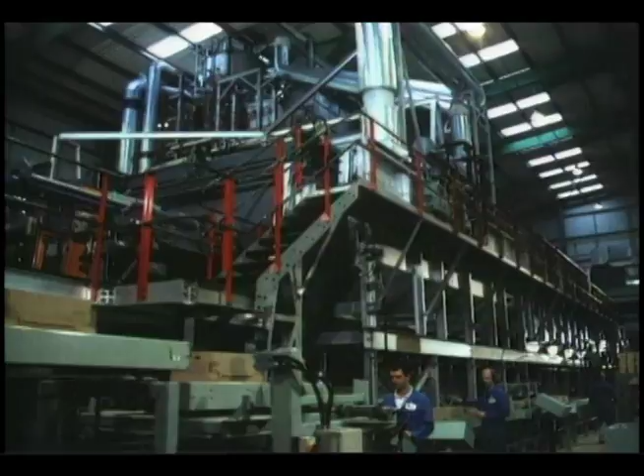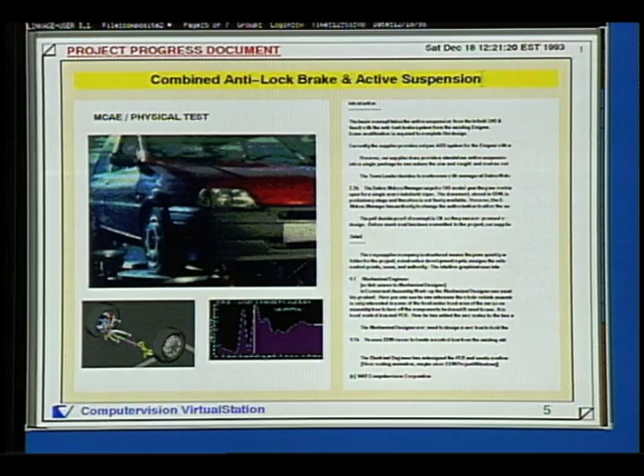Competition. It's the driving force keeping companies on top of their game. To stay on top, a company must constantly be on the move to improve their business, not how it is today, but how it will be tomorrow. What will keep them one step ahead of their competition? Re-engineering the product development process for flexibility and rapid response to changing business requirements is the key. And that key is realized through efficient data management, optimally using product information as a competitive advantage.

Sabre Motors has been doing this for a number of years, and it's kept them on top, especially with their mid-size sports sedan, the Elite. The Elite's enjoyed being #1 in its class for several years, but the competition's been extremely tough. Today, it faces a major challenge from the Toyota Camry for the #1 spot in 1995.

Well, the Camry has made a major upgrade in its MacPherson strut suspension system for 1995. They're attempting to appeal to the consumer's demand for a more aggressive, well-balanced ride from a mid-size sports sedan.

So to maintain our leadership in this class, we've decided to make a bold move. We want to offer a combined package of ABS braking and active suspension, all controlled by one ICU, an intelligent control unit. It's really a major undertaking on our part, but one we feel is necessary to maintain our leadership position. To undertake a course of action such as this, a company must be confident in both its resources and its infrastructure. Sabre Motors has a history of constantly and consistently rising to the challenge by always looking ahead, seeing how best to align itself to the job at hand.

And one of the keys that Sabre's come to rely on is its agile product development process. The automotive arena has always been one of constant change. Ever since Henry Ford began running Model Ts down an assembly line, the call has been for innovation and thinking about tomorrow. The concept of re-engineering is a way to maintain those principles.

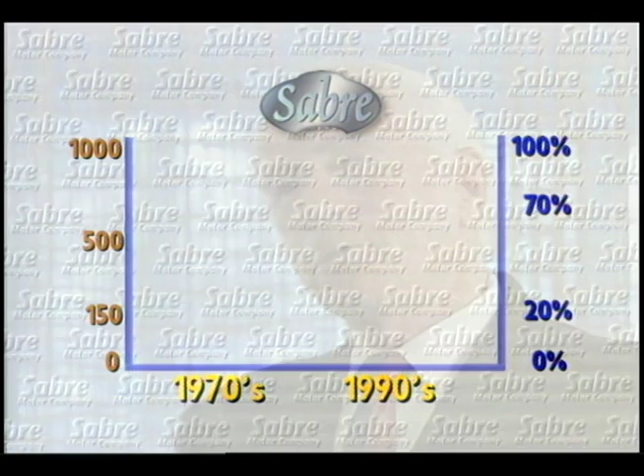And a key part of constantly reconstructing our processes is having a virtual team of key suppliers as our extended enterprise. Now, back in the 1970s, we had a cadre of about 1,000 suppliers who worked on parts and components that made up about 20% of our automobiles. Today, we have fewer than 150 suppliers, not only designing and building parts and components, but also major subassemblies and assemblies that make up 70% of our automobiles.

They are true partners in our business, and the relationships we form with them are critical to our success. In fact, today, we only need to concentrate on the activities at which we excel: body styling, powertrain, and final assembly. For this project, we'll call on Intuitive Vehicle Systems, or IVS as we know them, to design and manufacture the suspension and brake assembly.

Now, their technology matches ours, so we can offload a project such as this to them and still have an in-house sense of communication. What I mean by this is I have this workflow management tool, which essentially provides me with the ability to define, monitor, and redefine any product development process that I have.

Now, with this tool, I can define a new process with 4 major stages: concept, in-work, road test, and release. Since the project has been assigned to IVS, I can monitor them through this tool, and they can interact with me to keep me updated. I can assign milestones and control points along the process.

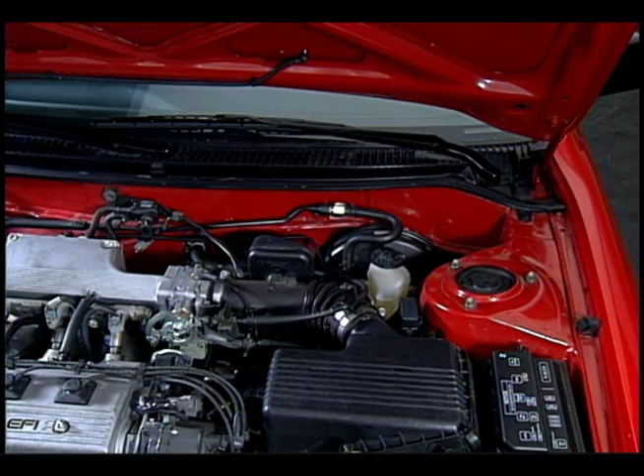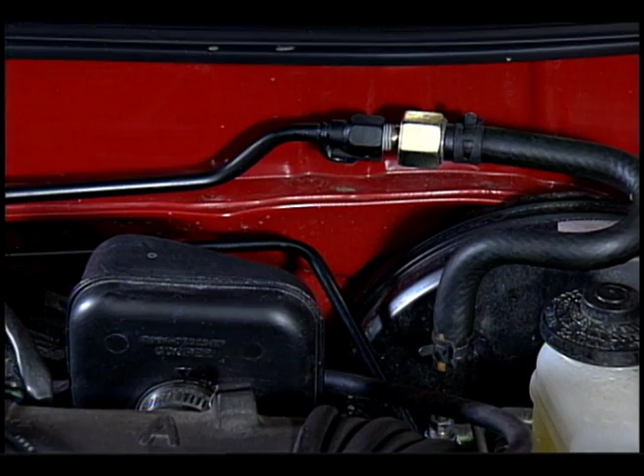We've got to take the existing ABS braking system from the Elite, modify an existing active suspension we created for another manufacturer's upscale model, create an ICU to control both systems, and then fit the control unit and related harnessing into the engine compartment. Now, my first concern is with the real estate under the hood. There always seems to be a problem finding a suitable location for these types of components because the engine compartment in today's car is so tightly packed.

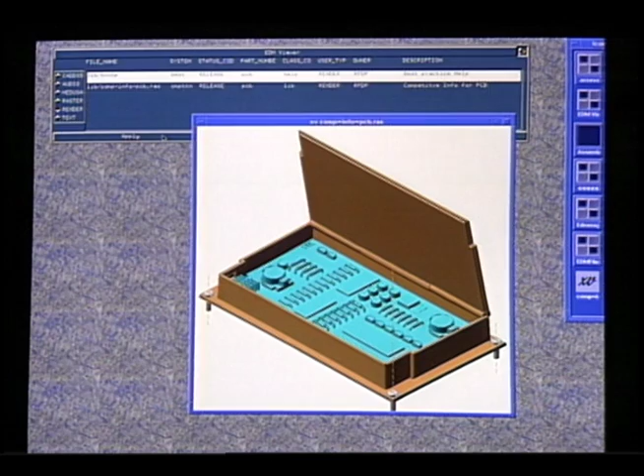Before I begin my design, I want to check my database for our best practices in creating these systems. In his data management system, Doug finds multimedia documents created during past projects outlining the proper steps involved in designing these types of systems, providing an invaluable roadmap for his current task. Doug notes he has mail from Evan Stokowski, the control system designer.

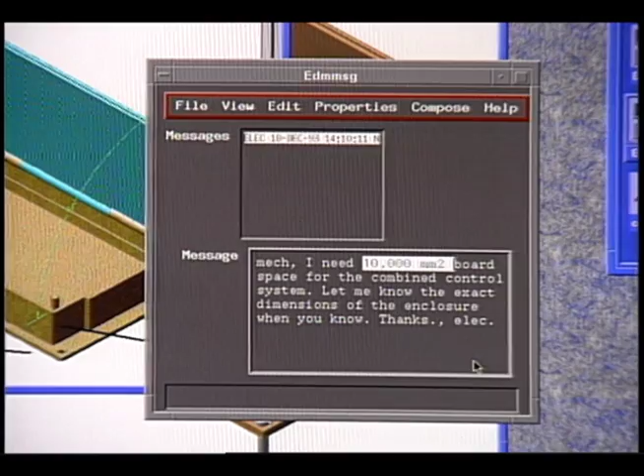Evan has analyzed the requirements for the ICU and identified the necessary PC board space he'll need. Now, I've checked my historical documentation on these types of assemblies, and I've gotten my PC board requirements from the control system designer. By looking at my past documentation, I confirmed that the best location for the ICU will be high on the bulkhead, away from the water and heat.

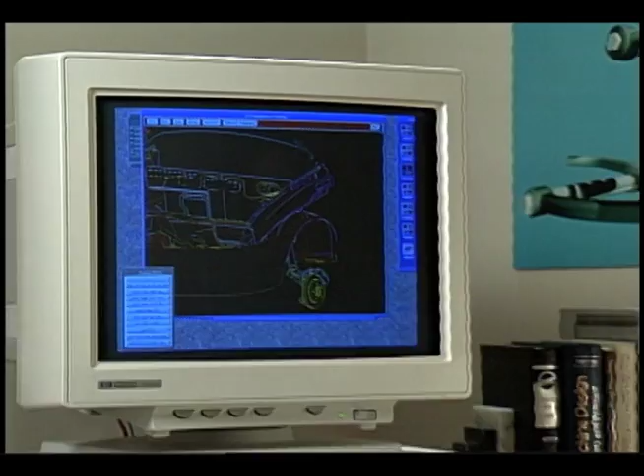Now, what I suspected is true. With the board space required, there's an interference with one of the windshield wiper motors. I need to discuss this with Ray Atkinson over at Sabre before I proceed.

Doug discovered this interference by looking at actual Sabre drawings on his system. He now contacts Ray to begin a CV conference. This conferencing capability will allow both Doug and Ray to view the actual part file, which can be worked on by either party, and discuss the pertinent issues involved.

When I got the size requirements for the ICU, I was afraid this would be the case. As you can see here, the ICU placement clashes with the left side wiper motor.

Now, hold on a second, Doug. I don't think we have a problem here. Let me just check some documentation on this.

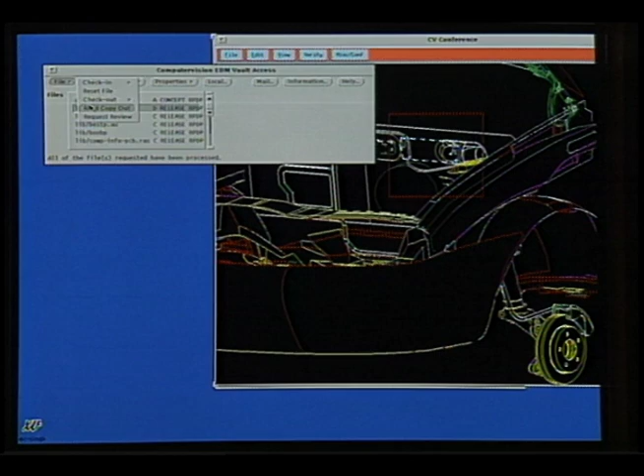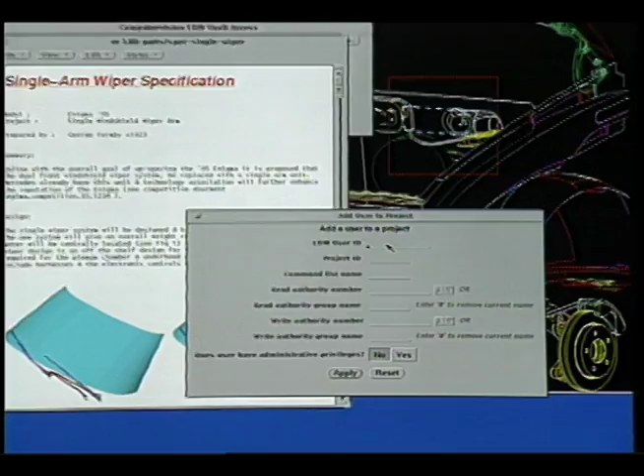Yes, just as I thought. I've got some good news for you. We're incorporating a single windshield wiper design for the 95 Entima, and we've got another supplier creating the design specs. Let me just change the authorization so you have read access to the wiper project document, and that should help you with the ICU placement.

Ray has the ability to authorize Doug to review the new windshield wiper design from another supplier because they all share the same technology.

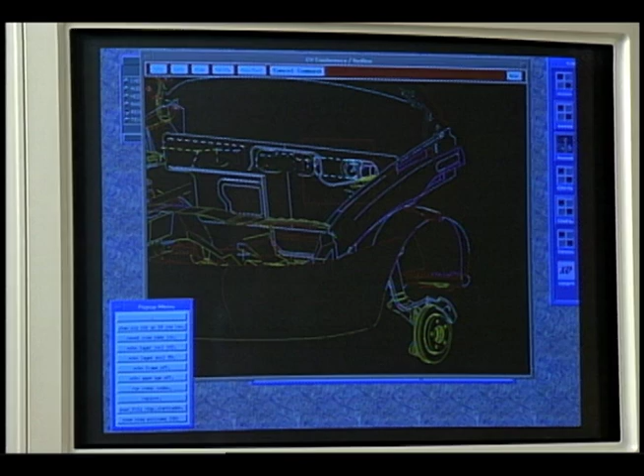Once Ray has provided Doug with this access, Doug can call up the new design, overlay it with his existing design, and see that the interference is no longer a problem. Now both suppliers have been added to each other's development project so that they will receive updated informational messages.

Okay, Ray, I see what I'm working with now. This shouldn't be a problem. I'll be in touch. All right, bye-bye.

A simple conference on the phone and the screen alleviates a lot of problems for me. I'm able to eliminate the interference I was worried about, and I'm able to see what the other supplier is doing with their new wiper design. Without these capabilities at my fingertips, I could have spent days running down the wrong road.

Doug has completed the first stage of the process, the concept stage. He can now move on in the project to the in-work stage. Once he's done this, notification is automatically sent to every member of the team.

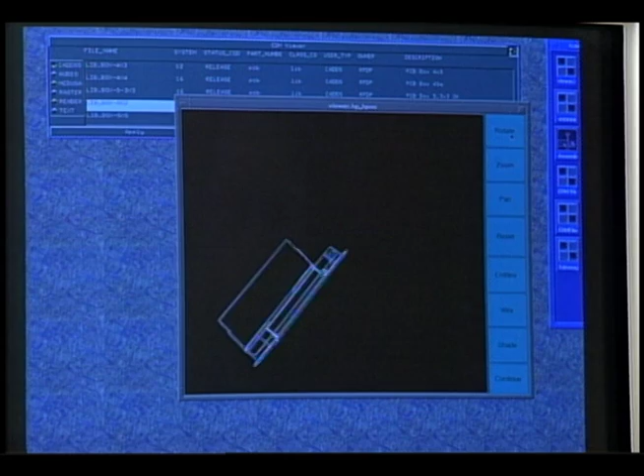Using the real estate requirements from the control system designer, Doug, with a simple query of his library, can browse through a number of existing designs. Doug finds several boxes which will serve his needs. He can call up the parts on his system and view them. From this, he can decide if one of them will suit the cabling and fitting requirements within the engine compartment.

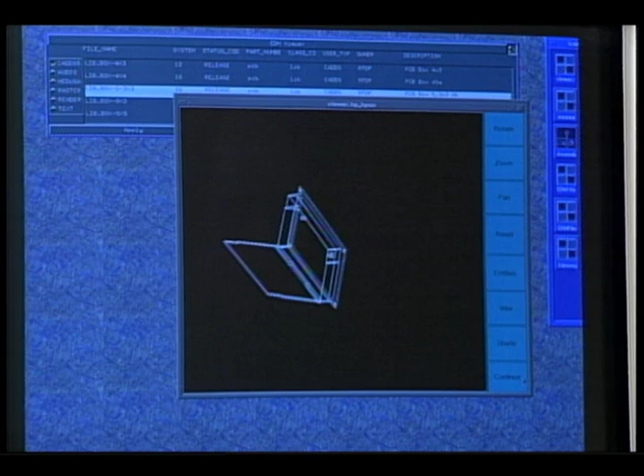Doug finds the box he needs existing within the database and sends the physical specifications off by mail to Evan Stokowski, the control system designer.

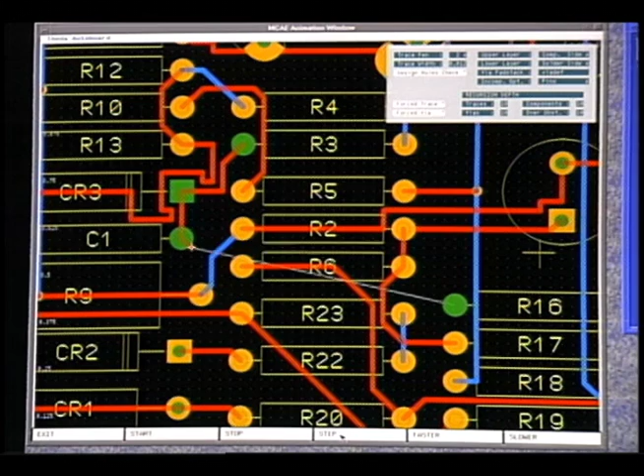When I received the mail from Doug containing the selected enclosure box, I was able to take my preliminary PC board design and tailor it to fit the box's exact measurement and features. It was fairly simple just to reposition the components and reroute the connections so I would have a functional board controlling both the ABS brakes and active suspension system. Then I just transferred the logic board design through to a three-dimensional representation to use within the mechanical assembly.

It's now time for Doug to finalize his design. To do so, he'll begin with a definition of the assembly and subassembly relationships of the entire vehicle. But Doug is only interested in the engine compartment, so he can go to his assembly tree and concentrate only on the components he needs to see.

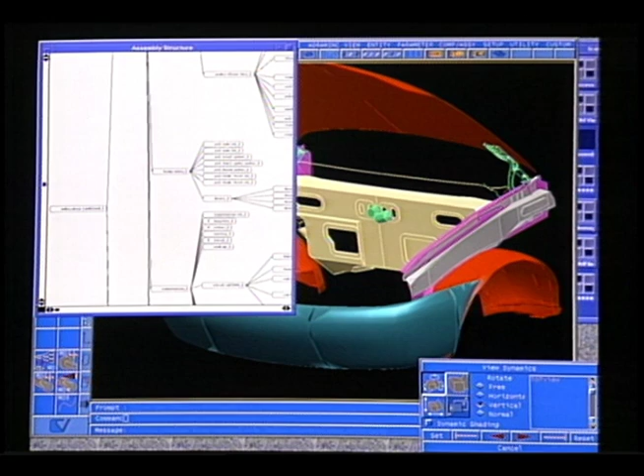I want to create a new subassembly for the design work that I want to incorporate: the ABS system, the modified active suspension system, and the enclosure box. Now, as I do this, my mechanical assembly is automatically updated.

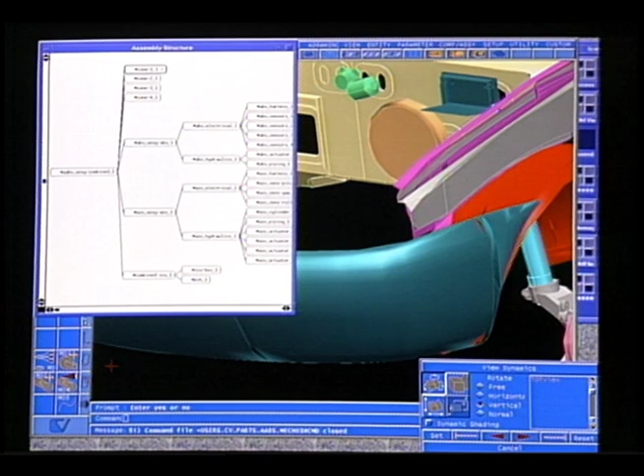Now that he has brought in these new assemblies, he can bring them out of his data management system and locate them where he wants them. The enclosure box is placed on the bulkhead, where Doug can run interference checks to reconfirm there are no clashes with the surrounding components. It's fine where he's placed it.

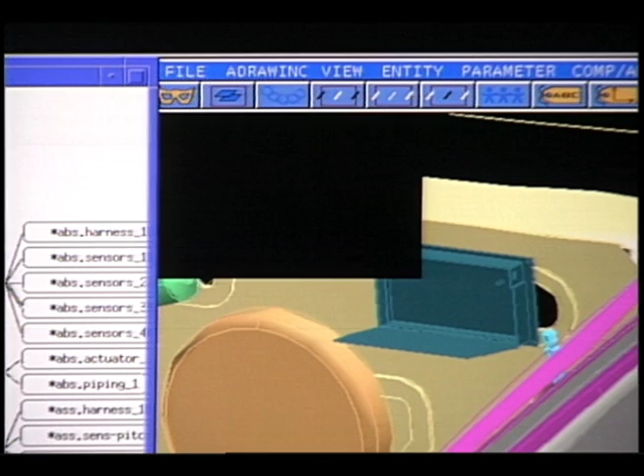Now, once I've placed the enclosure box, I can file that change in the assembly so that everyone involved in the project is updated. Now, as I do that, the PCB Evan created is already in place.

Now, this interactivity within the assembly is not just with one member of the team, but with all of them, no matter where they are: Ray at Sabre, another supplier, our structural analyst who's been verifying these designs for me, our drafter who's been producing drawings, or our technical illustrator who's been creating exploded assembly drawings.

Back at Sabre, the virtual team leader, Ray, has had his own form of interactivity by means of his own virtual tool, the virtual station.

All along the process, I want to keep tabs on how it's progressing. I can do so easily and efficiently with the virtual station.

It's a state-of-the-art multimedia tool, which automatically goes out to every application that a member of the team might be using, extracts the pertinent information, and then assembles it in document form for me to browse whenever I need to see how things are going.

As Ray looks through his virtual station document, he sees that the concept has been accepted and the electrical system design is complete. Each page represents a different task area of the development cycle.

Those which are not complete may cause him to redline them, to call out a question on a particular area, as he's done here, looking for the control box location.

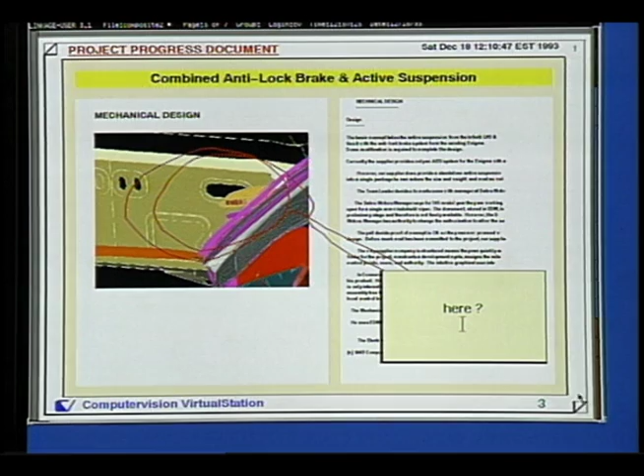Since Doug has just completed the placement of the control box, when Ray refreshes his document, that particular information is updated, and Ray sees by the check mark on the index page that the mechanical design has been completed. By turning back to that page, he now sees the control box location as well as the suspension assembly and the ABS brake system details on the bottom of the page.

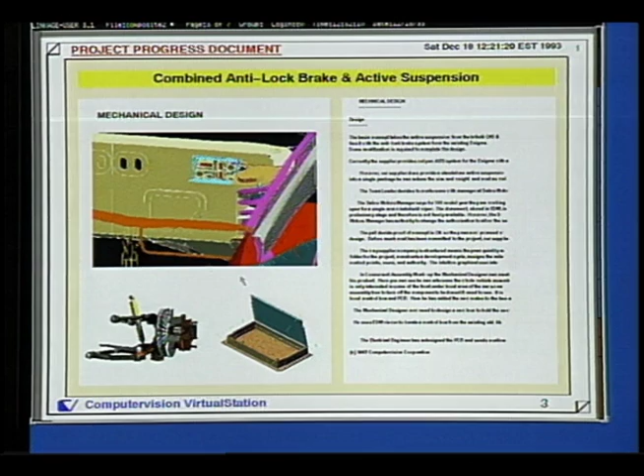The in-work design is complete. It's now time to build a prototype and road test it, the next step in the process.

These tests are performed both on the road and in the laboratory. The results derived from them are then benchmarked against the mechanical analysis tests that were performed on the CAD models.

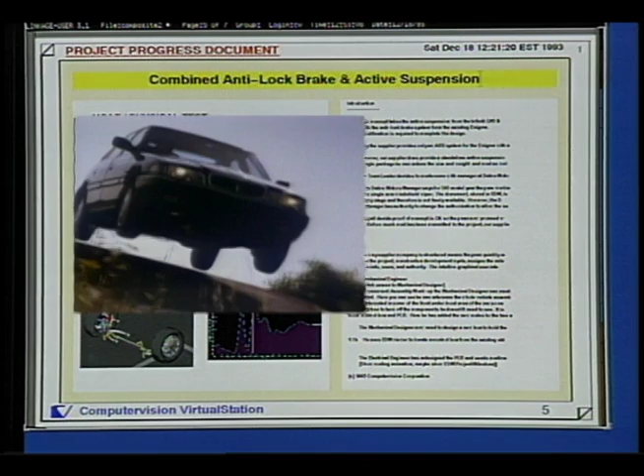Ray can easily see these results on the test page of his virtual station document. They prove out what is found in more and more cases: the time to complete a successful road test is significantly reduced because of the CAD analysis.

All along the process, Ray has been updated through mail messages as well as by checking his virtual station document. Now, he receives a message that only he is authorized to approve: the final design.

All the road tests are complete, and Doug has requested an approval for the design. I can now review the entire process by looking through an updated version of my virtual station document.

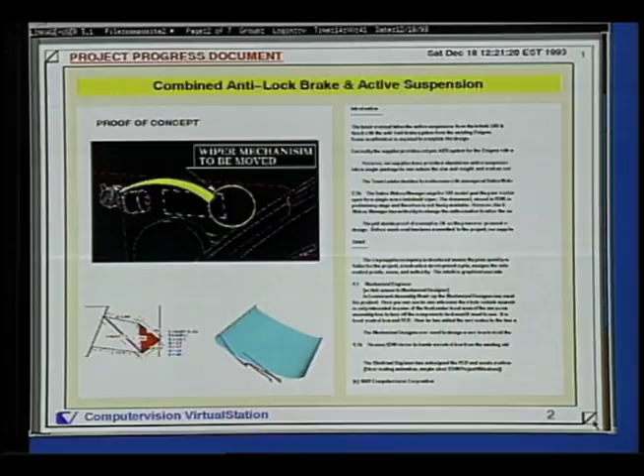Now, every task has been completed successfully, so I can now approve the release of the design in my data management system and use the virtual station document as a best practices example for any future work in this area.

By utilizing a collaborative system-oriented approach with IVS, we've been able to cut our development time by 60%. We're able to seamlessly work with Sabre and other suppliers to share designs and information. The result is a cohesive virtual team that keeps the elite on top.

I know that the benefits I derive from this team-oriented system are magnified downstream by every other team member. I'm confident that we've put together a strong, effective team with our people and our suppliers. I'm confident that their work is at the optimal level. And I'm confident that working this way will keep the Sabre Elite right where it belongs. Number one.